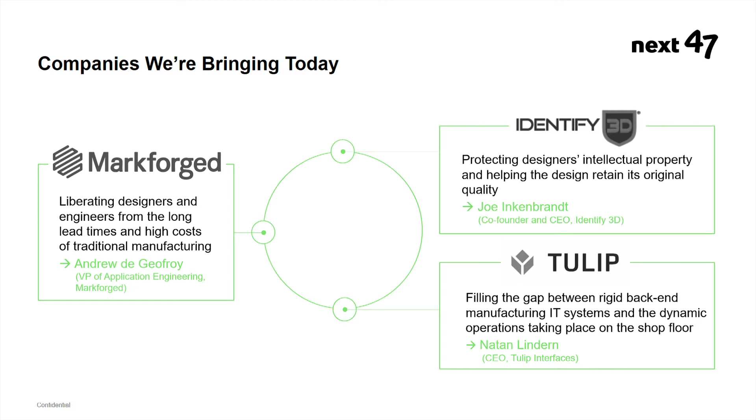As mentioned, we are in additive manufacturing, which most people commonly know as 3D printing. What we're going to talk to you about today is accelerating the process of bringing a new product to market, what we call accelerating hardware.

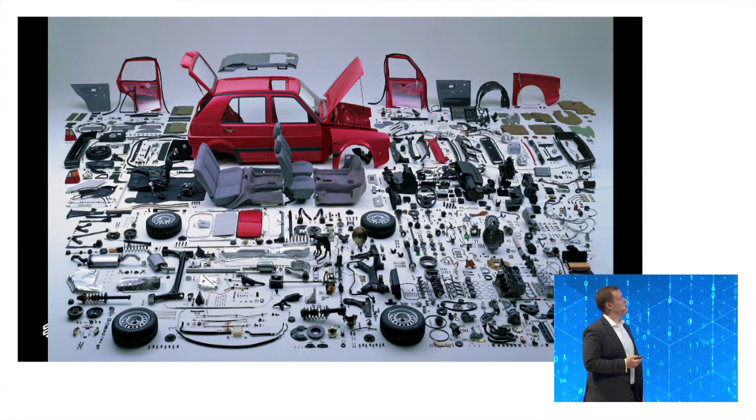Many of you may be familiar with this, the Tesla Roadster. This was the first car that Elon Musk and team brought to market. If you look at a car, it's a very complex, complicated piece of machinery, evidenced by all the different parts you need to make. You can clearly see that's not actually a Tesla, but essentially there are lots of different parts that go into a car, and each one goes through a long line of iteration, sometimes dozens or even hundreds of iterations, to get to a final usable end state.

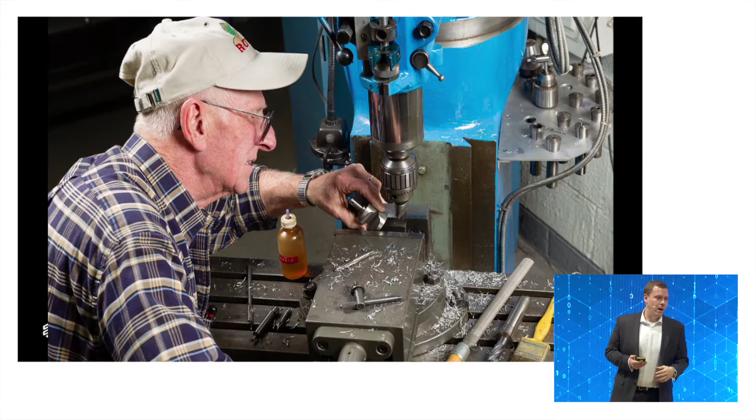So here's an example of what that looks like. Each one of those parts has to go to who we call Frank. Frank the machinist is the guy who typically would take that part and say, OK, it's going in my backlog, maybe I'll get to it in 6 weeks. Every single iteration you want to do has to go through Frank. What we're trying to do is figure out how we can speed that up.

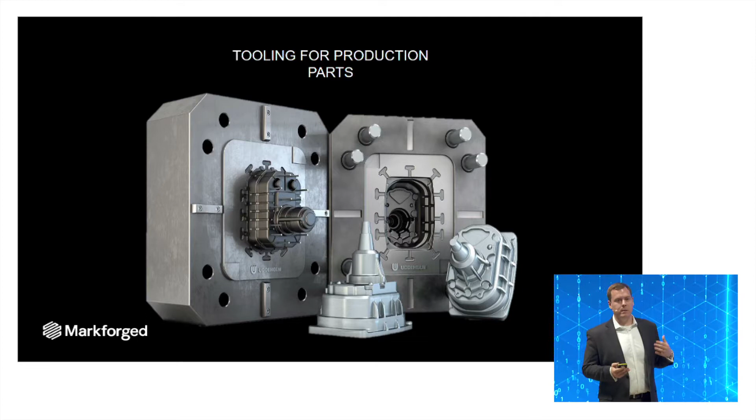In 2008, when they launched it, that was after 5 years of product innovation and developing all the different necessary parts to bring that to market. The really crazy thing is that's about the same amount of time it took Ford to bring the Model T to market. So 100 years have gone by, and almost nothing has changed in terms of how long it takes to bring a really complex product to market.

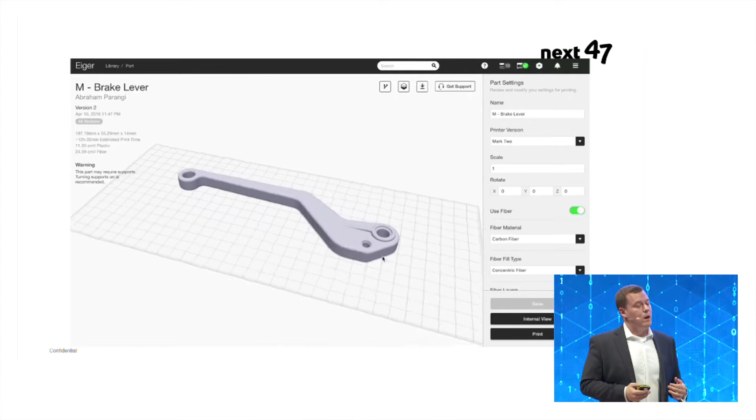So this is kind of where we come in. We wanted to come up with a very easy way that you can effectively choose a part, choose the material you want to print it in, and print that on any printer around the world seamlessly from one place. That's what we've built with Markforged.

We support a full range of materials because different products may be made of several different materials, but for any individual part, you want to choose the best material possible. So we support a full range of materials from plastics to composites to metals, and we'll talk a little bit about each of those briefly.

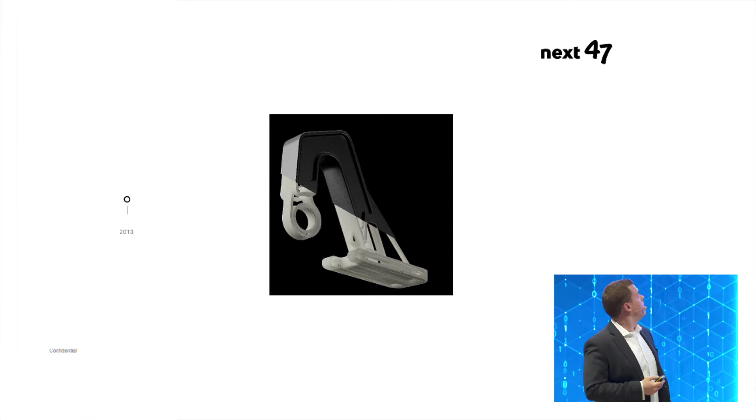So this slide got messed up. This is supposed to be a great timeline of our company history here, but it looks like the slides got a little messed up, so we'll just jump ahead.

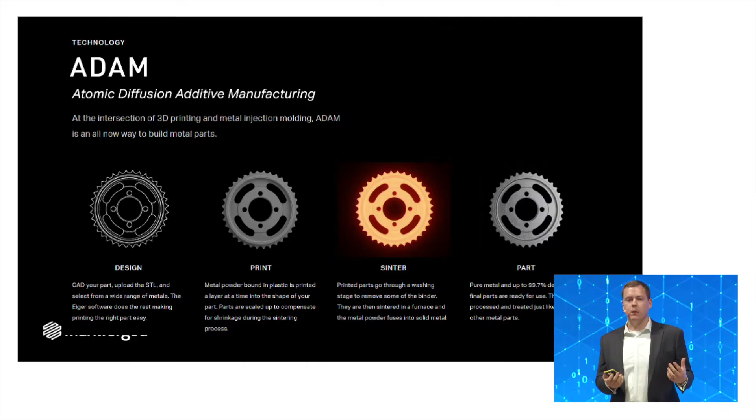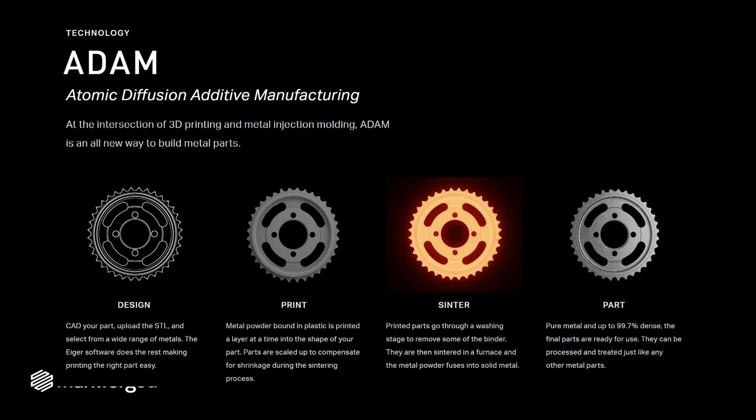Essentially, what we've developed when it comes to metal 3D printing, which is all the buzz right now—you can go check out some sample parts over here you can play around with—we've pioneered a process called Atomic Diffusion Additive Manufacturing. If you're familiar with MIM, it's similar in that we can produce parts that pass MIM standard by printing 3D printed green parts that can then go into a standard sintering oven or our own end-to-end proprietary sintering system. Our thesis here is that hardware should be fast. We want to accelerate the process and try to take it down from 5 years down to 1 or 2 if possible.

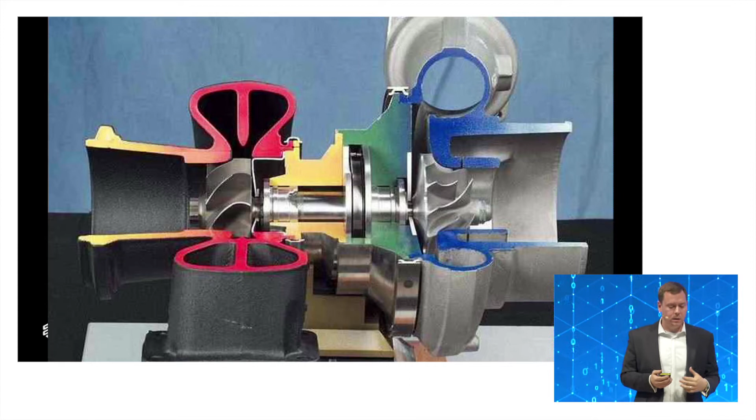Basically, we can produce the impeller here you see on the right side. What this does is takes exhaust from the engine and uses it to spin a turbine, which turns a shaft connected to an impeller and adds more oxygen to the engine, increasing its efficiency.

This is a perfect example of where we can help prototype that part, because as you can see, this is a very complex part that if you were going to do traditional machining techniques, that might take you several weeks, if not maybe months to iterate on, and you need a 5-axis CNC machine to be able to produce that.

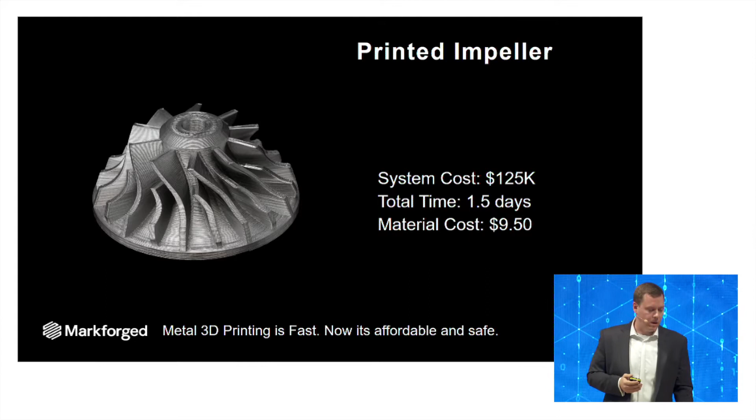Now, we can 3D print that part. Our total print system to print that part end-to-end will cost about $125,000. But the total time to produce that individual part is going to be around a day and a half, and a cost of about $9.50. So what would typically cost you thousands of dollars to iterate on every single time, and weeks if not months, we can turn around and actually help you iterate on that prototype part in just a couple of days at a fraction of the cost.

But what we really want to talk most about now today is end-use parts. So we have a few case studies here. I'm not going to go into too much detail on them because they're all available on our website at markforged.com/applications. So you can download all the details on this there.

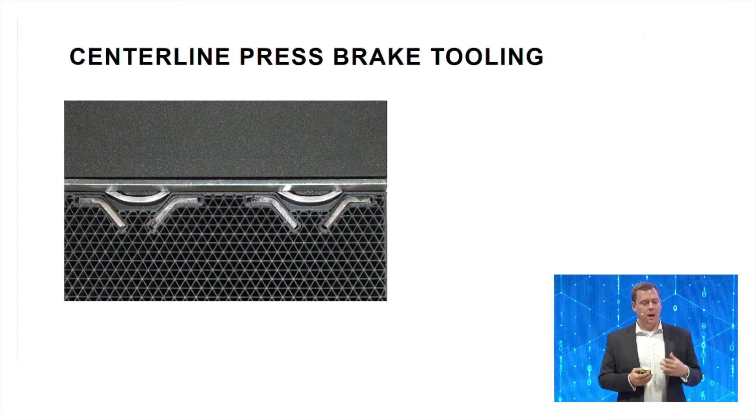But a few highlights. This is an example of... well, the background got changed and the text didn't. But the really key point here is that CENTERLINE Engineered Solutions is a customer of Markforged. They essentially use our 3D printers to print industrial press brakes that they can use to then produce parts for their customers. Most cases, doing this is prohibitively expensive, but by being able to spin up and produce a new press brake tooling fixture, they can essentially do this for customers in a way that they never could before.

I'm going to jump ahead here to the end. Again, there should be text here. Not sure why there isn't.

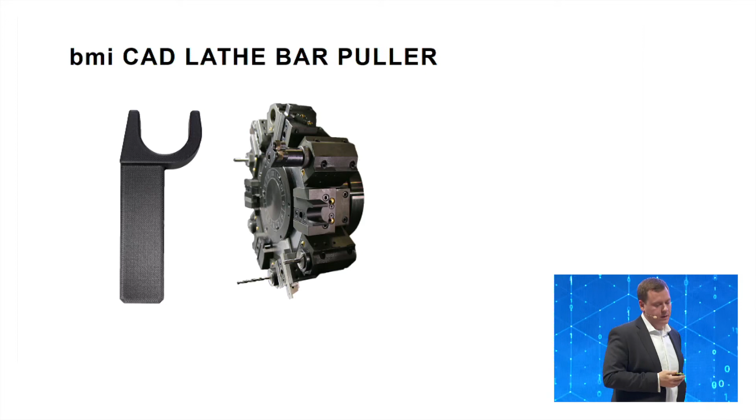So this is an example of a part. It's a lathe bar puller. I won't go into the details of what that is for people who don't know, but essentially this is a part that would typically take $10,000 to $30,000, and we can produce that for under $10 per one.

These case studies would be great if I actually had the data on them. Sorry about that.

So I'll jump ahead to some of the ones that hopefully came out a little bit better. So Stanley Black & Decker is a customer of ours. They have a $1.5 billion division that focuses specifically on heavy industry applications.

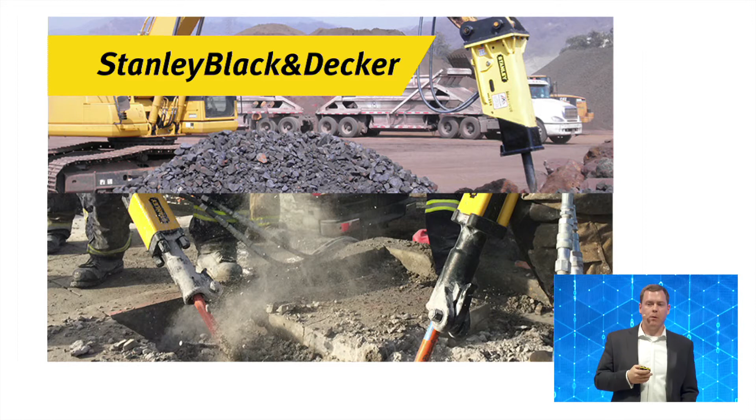So these are very low production tools with long lifespans. They need to be extremely durable. They have to be high value. These are tools that are going into equipment that's thrown around all day that's really taking a beating. And so as an example, this is a post driver.

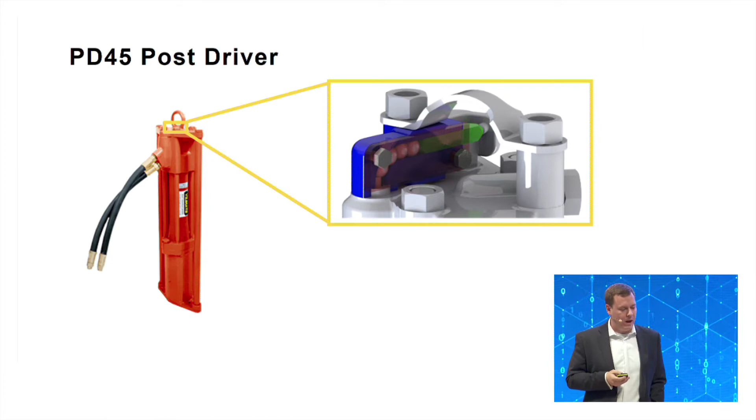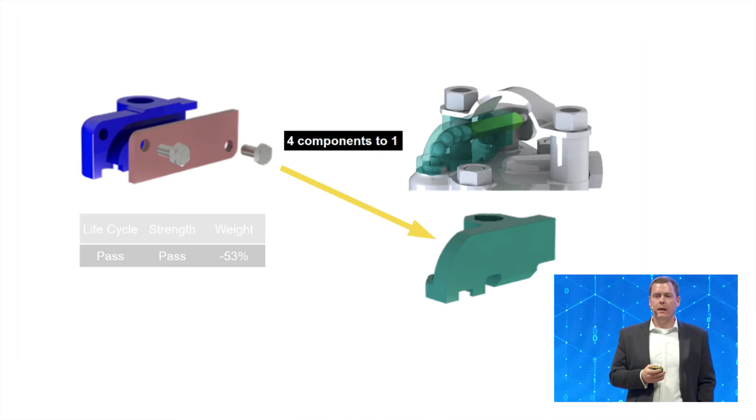Now, if you look at this post driver, there's essentially a hydraulic actuator up there that you can see is a pretty complex piece of machinery. And when these break down, they're really hard to replace, partly because they have several different components that need to be iterated on every time. And what you can see here is we were able to design that for additive manufacturing and 3D print that as one single part, which allows us to derive tremendous ROI, iterate those faster, and get them spun out much quicker.

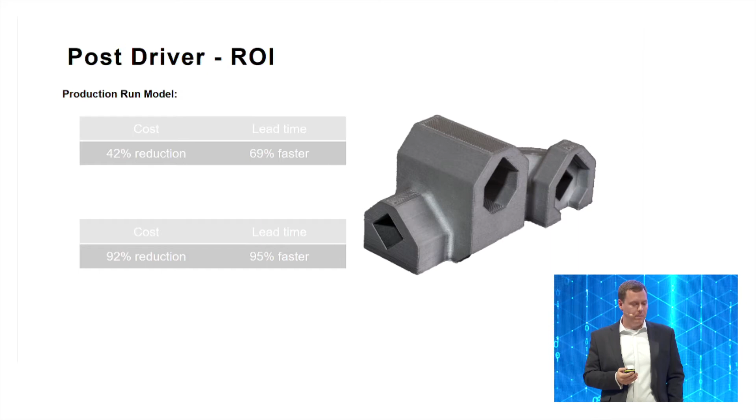The ROI on this was tremendous. So we actually have an example of this over to my right here, to your left. And essentially, we're able to produce this part at about a 42% cost reduction and 69% faster than they typically make them for a production run model.

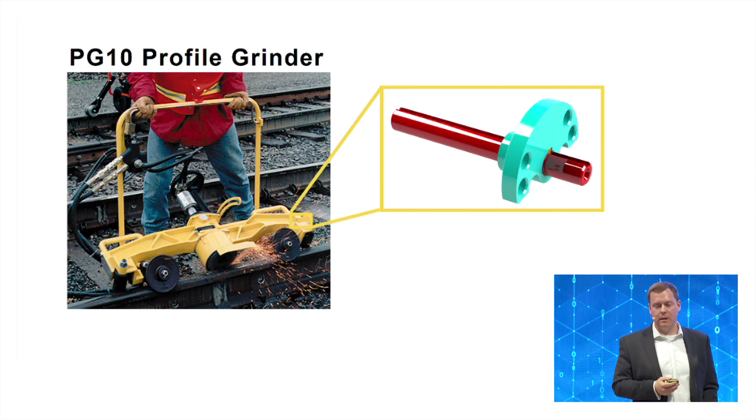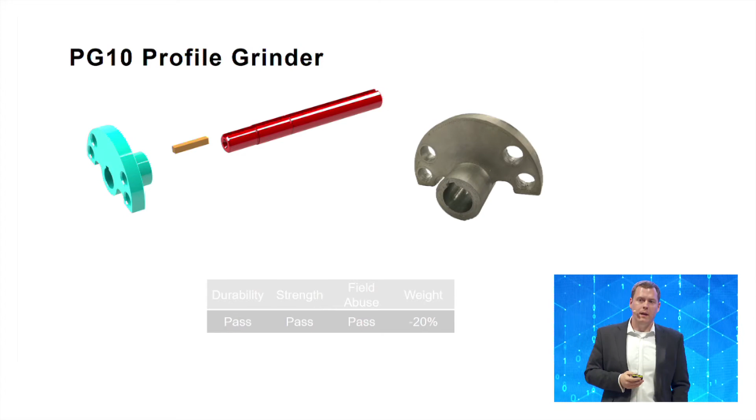As a profile grinder, another example of a part, a very complex thing that doesn't need to be replaced very often. So it's prohibitively expensive to have to create a new one of these every time they need to. We were actually able to consult with them on breaking this into 3 different pieces that could either be taken off the shelf or 3D printed using our metal printers so that they can just print the part that they need that's hard to create and use off-the-shelf stuff to speed up the time to production.

You can see the ROI there: 35% cost reduction, 48% faster. And again, these are all on our website if you want more details.

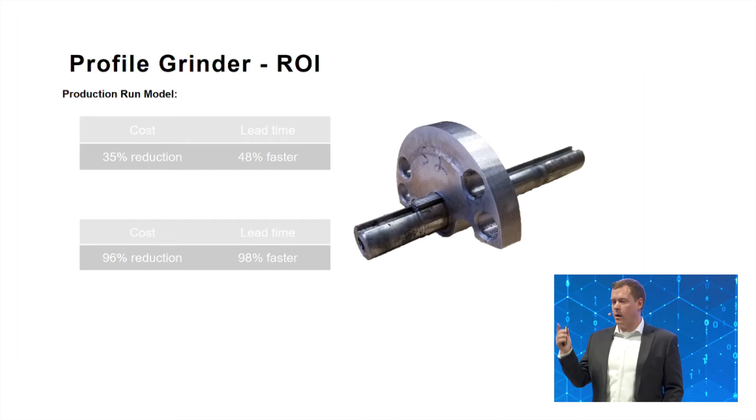One of the things that's especially useful about what we do at Markforged is you can buy one printer if all you need to do is make a couple prototypes, or you can buy 100 printers if you need a much larger production footprint. We make it very easy to scale up and down based on your needs because of that.

Lastly, we'll talk about assembly. This is, again, about how we take all those different parts of the car and pull them together. As Elon Musk said, what really matters is being able to scale up production volume as quickly as possible. Last month, Tesla was supposed to produce 1,500 Model 3s. They only made 260, and a lot of that comes down to their manufacturing line and their inability to assemble and put these cars together as quickly as they need to.

So this is another example of this. In an assembly line, now that you've actually done prototypes and put together your end-use parts, you have to build a manufacturing line that can produce all these. We actually have a lot of applications there that can help as well.

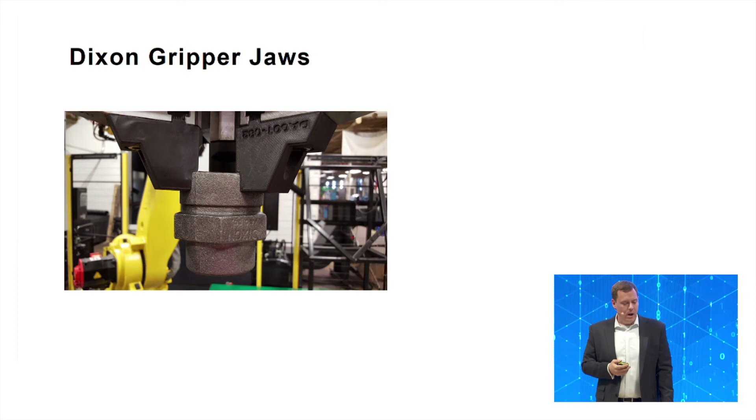Another case study here - the idea is that Dixon has been a long-time customer of ours, and they use our 3D printers to produce gripper jaws that can be used to pick up and move the different valves from place to place. These are things that need to make sure they're not going to damage the actual part itself.

So we have non-marring materials that they can use to pick up and move those parts, as well as steel grippers we can use - let's see if this will play - essentially pick up and go into a valve and spread out to pick it up. But it has the hardness needed to pick that up and handle a threaded part without damaging itself.

Another example here: this is Dexter, a robot built by Haddington in Las Vegas. This is a startup that makes modular, configurable robotics with onboard supercomputers running open source code. The really cool thing about this is they printed every part of this robot using our 3D printers. That's a real example of them being able to completely build their own assembly line and their robots using our 3D printers.

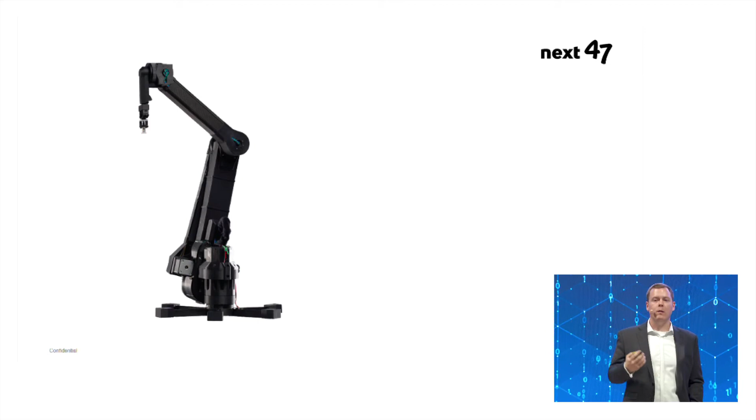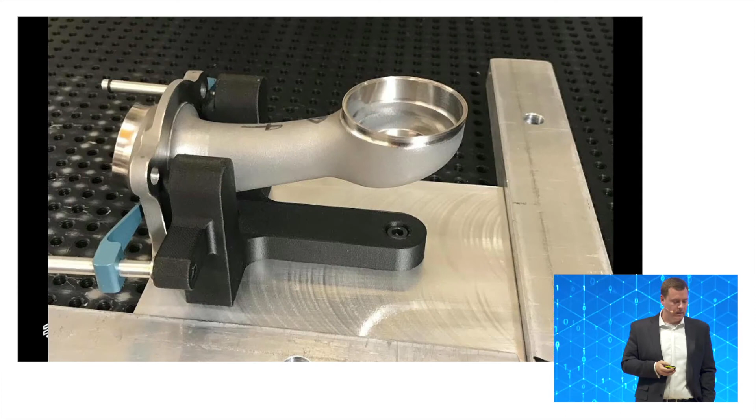And again, we can do this for things like lapping fixtures, custom lathe tooling, non-marring CMM fixtures.

Another example: this is a major automotive manufacturer. Essentially, they had production line stoppages constantly. They had a car chassis that was crashing down on the locator tabs, which were made out of machined aluminum that kept breaking. An engineer printed a Markforged fiberglass part replacement, took it home, beat on it with a hammer to prove how hard it was, and then he replaced a single cell on the line.

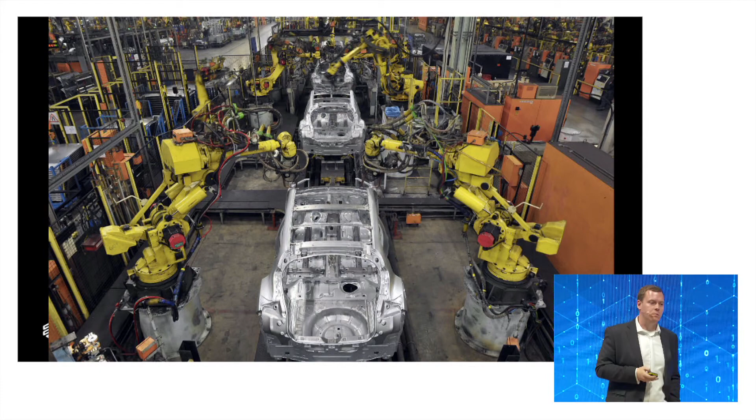That cell stopped breaking down. Now every cell has Markforged parts, and they were able to improve their car production time to about a new car every 12.3 seconds. The engineer who introduced that solution was promoted as a result. So that's a story we love to talk about.

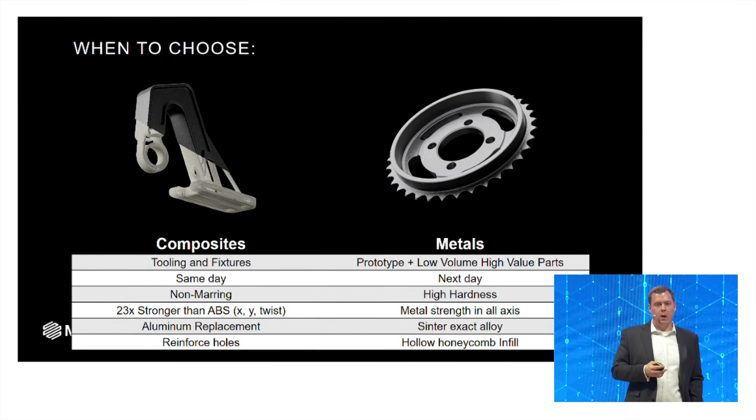Again, because we offer the full range of materials, we allow you the freedom to choose the right material for the right job. Here's a breakdown of when you want to use different ones for different use cases. But essentially, we are trying to span the entire production life cycle, and that's really how we're trying to crunch that down from 2.5 years down to a much reduced process that could even be as short as less than a year or 1 to 2 years.